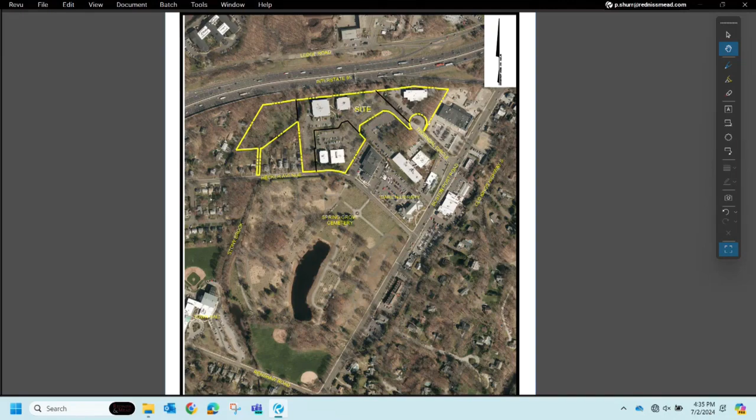This is the subject site of the Thorndal Circle property. It is accessed off of the Post Road via Thorndal Circle, bound to the north by I-95, the south by Hecker Avenue, and to the southeast by these properties along the Post Road.

This is the existing condition survey. You can see these are the 5 office buildings that are going to be removed and replaced with apartment buildings. 1 Thorndal Circle discharges via sewer lateral out to the 8-inch main in Thorndal Circle. 20 and 16 Thorndal Circle currently connect to the 8-inch main in Hecker Avenue. And then 28 and 22 Thorndal Circle flow to the northwest of the property to a 12-inch town main that flows through the northwest corner of the property and continues through the western portion down to Hecker Avenue.

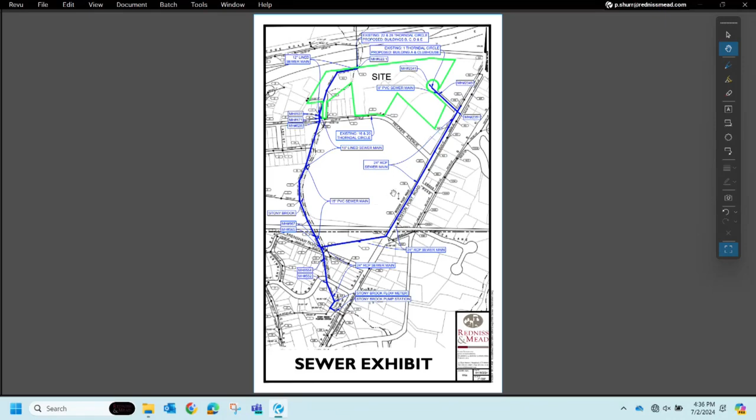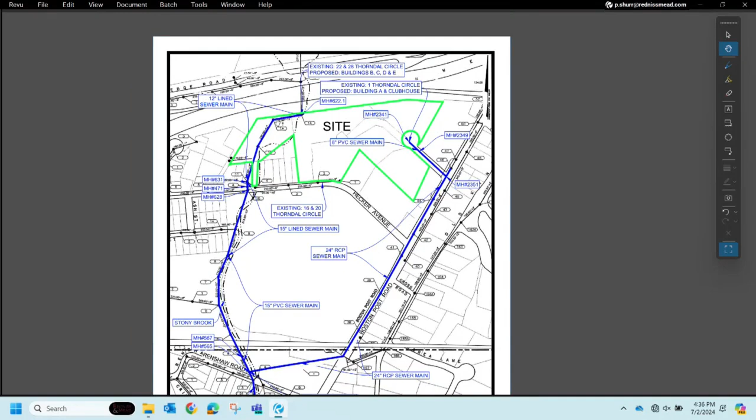Here I have a sewer exhibit laying out all of the sewer mains between our site and the Stony Brook Pump Station. The 8-inch main in Thorndal Circle flows to the 24-inch main in the Post Road. It then crosses the town property along Renshaw Road, passing under the Stony Brook, meeting the 15-inch main that parallels it before flowing down to the Stony Brook pump station. This is the 12-inch main that passes beneath I-95 and crosses our property, flowing into Hecker Avenue, where it meets the 8-inch main in Hecker and increases to a 15-inch main that parallels the Stony Brook all the way to where it meets the 24-inch main, and then continues to flow down to the Stony Brook pump station.

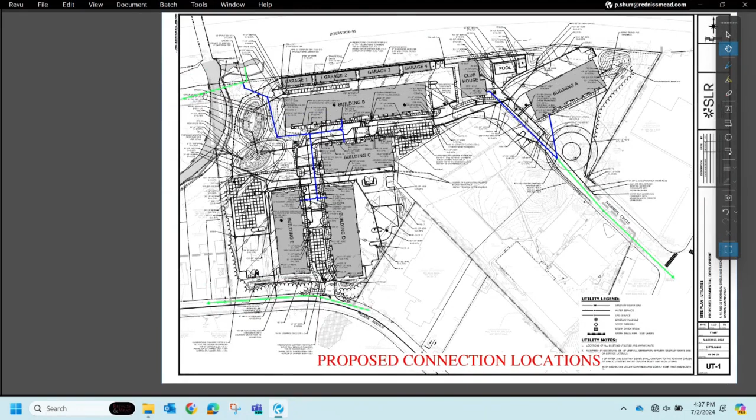Here we have the proposed plan showing the 5 new apartment buildings, clubhouse, and pool. The clubhouse and Building A both discharge via gravity to the 8-inch main in Thorndal Circle. The remainder of the buildings, via an on-site sanitary sewer system, discharge to the northwest corner of the property into that 12-inch main that crosses the property, flows through the western half, and meets Hecker Avenue.

In preparing this analysis, we had 2 study objectives. We analyzed the capacity of the receiving sewer under proposed conditions, accounting for known developments and additional potential connections within the sewer shed, for example, those currently on septic.

Objective 1 was to analyze the capacity of the gravity mains between the property and the Stony Brook pump station. Objective 2 was to assess the capacity of the Stony Brook pump station.

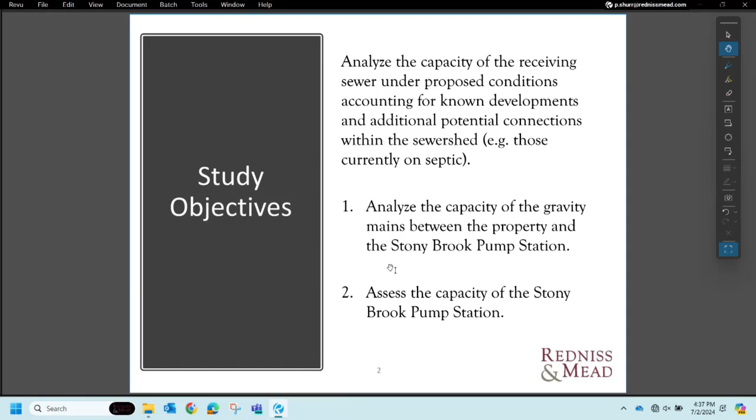For design standards, we turned to the Town of Darien Capacity Management Operation and Maintenance Program document prepared by Arcadis and dated December 2022, otherwise known as the CMOM.

In section 5.2 of the CMOM, it requires a site plan review with a design adhering to the town sewer standards and the New England Interstate Water Pollution Control Commission TR16 guides for the design of wastewater treatment works.

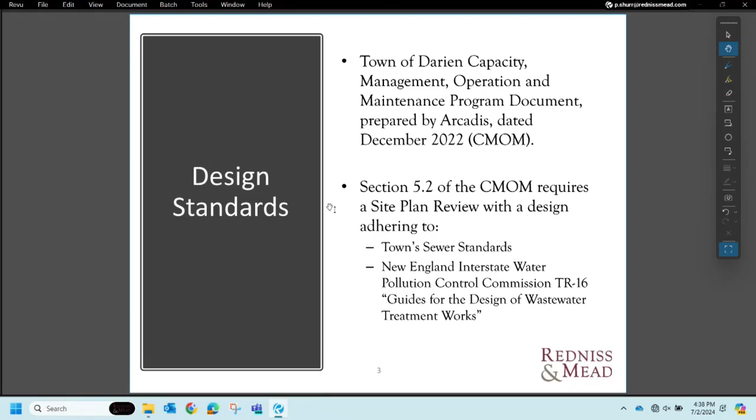Per the town sewer standards design requirements found in Appendix E of the CMOM, sanitary sewer and pump stations shall be completed in accordance with the design requirements of TR16.

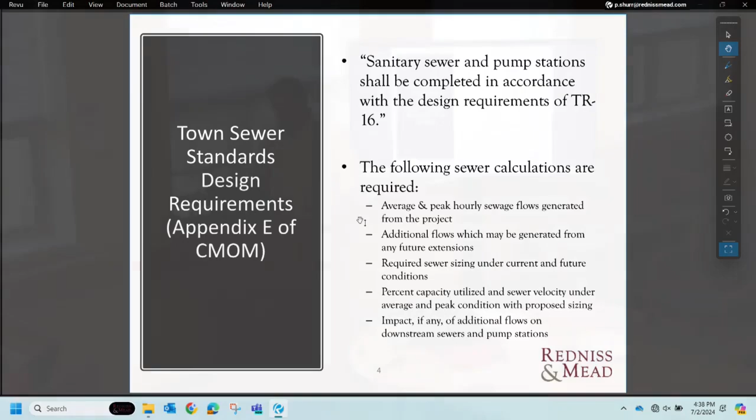It also states the following sewer calculations are required: average and peak hourly sewage flows generated from the project, additional flows which may be generated from any future extensions, required sewer sizing under current and future conditions, percent capacity utilized and sewer velocity under average and peak condition with proposed sizing, and the impact, if any, of additional flows on downstream sewers and pump stations.

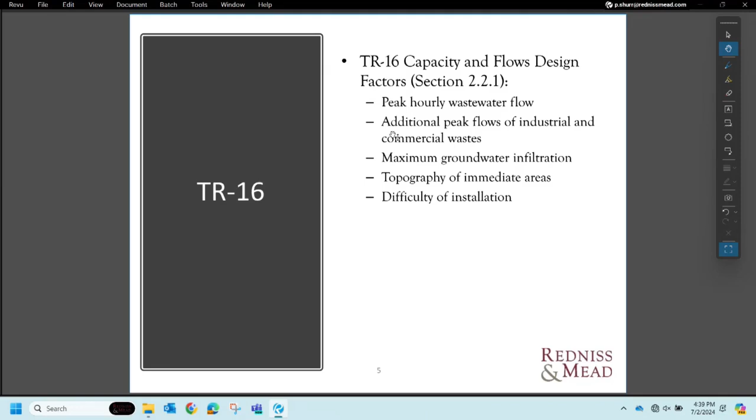So per TR16, the capacity and flows design factors include peak hourly wastewater flow, additional peak flows of industrial and commercial waste, maximum groundwater infiltration, topography of immediate areas, and the difficulty of installation.

Now when we got to evaluating the site flows, we were using the Connecticut Public Health Code. Under existing conditions, the 123,722 square feet of office space generated an average daily flow of 12,377 gallons per day. We then applied a peaking factor of 5.6 to that and converted it to CFS to get a peak flow of 0.11 CFS.

Under proposed conditions, you had the 274 bedrooms including a 50-person pool. The average daily flow was 34,825 gallons per day. And after applying a peaking factor of 5...

Can you do that calculation one time? Oh, yes, sir. So that people will understand it, because I'm sure that an everyday citizen is not going to understand your quick jumping from gallons per day to cubic feet per second.

Of course. So I would take the gallons per day, and the peaking factor is what takes that average gallons per day and calculates the peak instantaneous flow. Then I converted that to CFS by dividing it by 7.48, which is 7.48 gallons per cubic foot. Then I divided it by 24 hours in the day, by 60 minutes in an hour, and then by 60 seconds in a minute. That's how I was able to convert it down to 0.3 CFS. So that includes the peaking factor and then the unit conversion on top of that to get it to CFS.

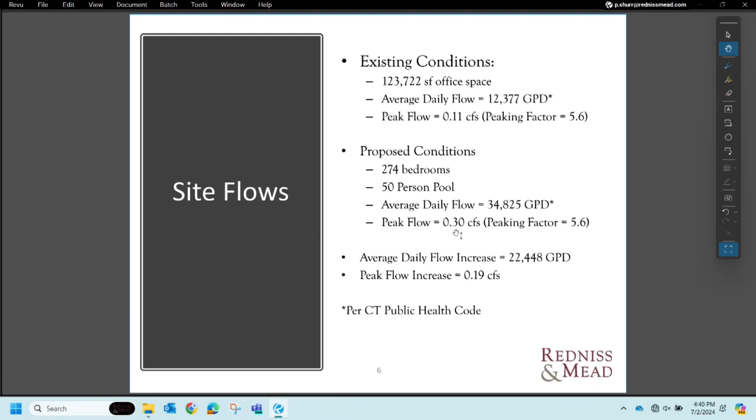So here we have the sewer shed exhibit. This is where we lay out the study points that were part of our analysis.

Study point number 1 is along the 8-inch main in Thorndal Circle. Study point number 2 is along the 15-inch main right where it crosses Hecker Avenue. Study point number 3 is along the 15-inch main directly upstream of where it meets the 24-inch main. Study point number 4 is located upstream of the Stony Brook pump station along the flattest portion of pipe in the 24-inch run, at 0.08%. Study point number 5 was at the Stony Brook pump station.

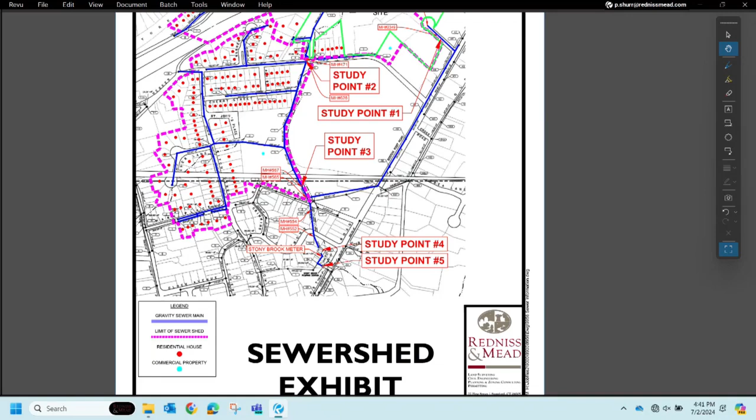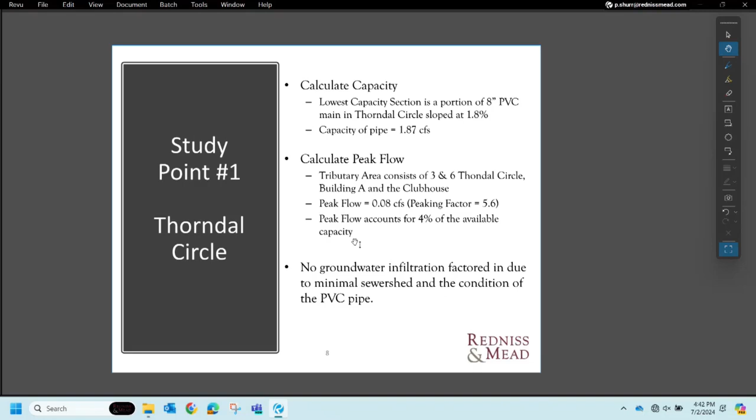So study point number 1, we studied the 8-inch pipe that sloped at 1.8% and found the capacity of the pipe is 1.87 CFS. The tributary area consists of 3 and 6 Thorndal Circle, which are the existing office buildings not part of this project, and then Building A and the clubhouse of the proposed project. The peak flow was 0.08 CFS, using a peaking factor of 5.6. The peak flow accounts for 4% of the available capacity of that pipe. We did not study groundwater infiltration because it was a small sewer shed and the condition of the PVC pipe didn't warrant it.

Next, we went on to study points 2 and 3 along the 15-inch main that runs from Hecker to the Town Hall property and Renshaw Road.

Study point number 2 is a 15-inch lined pipe sloped at 0.06%. Its calculated capacity was 1.71 CFS, and the peak flow flowing through it was 0.93 CFS, factoring in the tributary area and a calculation for the inflow and infiltration.

I apologize, I failed to point out that in calculating the flows for study points 2 and 3, you have a larger sewer shed up north of I-95 that had flow metering done by Arcadis. We factored in that flow metering and then did our own sewer shed calculation for the remainder not captured in the flow monitoring. So some represents what was measured by Arcadis, and we calculated for the remainder of properties within that sewer shed.

Patrick, one quick question. On your site itself, is it a 12-inch main sewer or a 15-inch? It's a 12. And that goes into a 15 at Hecker Avenue where the 8 and the 12 combine? Yes, sir. And the 15 all the way down through? Yes, sir. Cool, thank you.

Study point number 3, further downstream, is along a 15-inch pipe sloped at 0.16%. The calculated capacity was 3.05 CFS, and the peak flow was calculated at 1.37 CFS. We factored in additional I&I because of the additional pipe run between study points 2 and 3, and also over 100 residences that fall between those two study points. So the peak flow of 1.37 CFS accounts for 45% of the available capacity in the pipe.

We found in our study of the SSO logs provided by DPW that there were no rain-related sanitary sewer overflow events found along just this 15-inch pipe in the past 20 years.

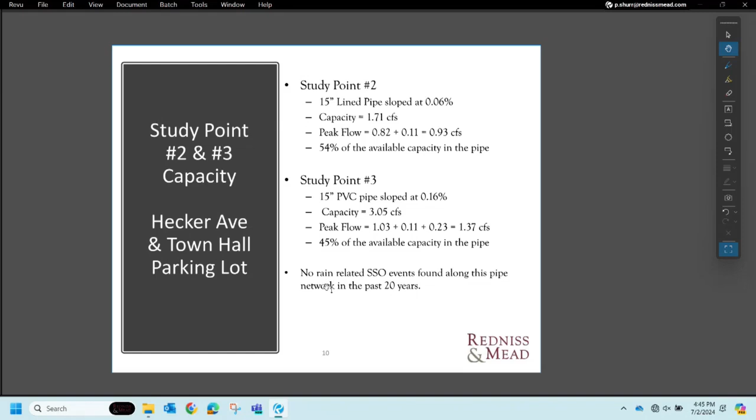Do we have any idea when that 12-inch pipe was lined? It wasn't part of this recent project, I'd gotten that information from Ms. McCarthy with Arcadis. And the 15-inch is lined too, right? That was maybe 30 years ago, could be the 80s. And the 15-inch, we got that PVC based off of, I think, the camera results, so that must have been lined previously as well. Thank you.

We installed 2 flow meters on April 24th, 2024 to verify our assumptions along this 15-inch main and witness the early initial impacts of the sewer rehabilitation. Flow meter number 1 was installed in the 15-inch main paralleling Stony Brook at study point number 3.

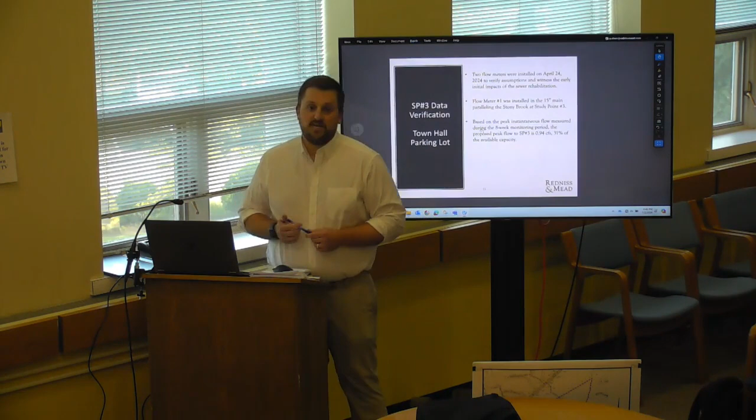We actually updated it because I wanted to take the most recent flow meter data, since we had that large rain event on Sunday - 0.88 inches in 30 minutes. When I looked at the flow gauge, flow meter number 1, we actually had our highest peak there. So I wanted to be fully transparent and make sure we had the highest possible number.

Study point number 4, as I mentioned earlier, is located just upstream of the Stony Brook. Fortunately, Arcadis had a flow meter right here, the Stony Brook flow meter, so we were able to use all their data in doing these calculations.

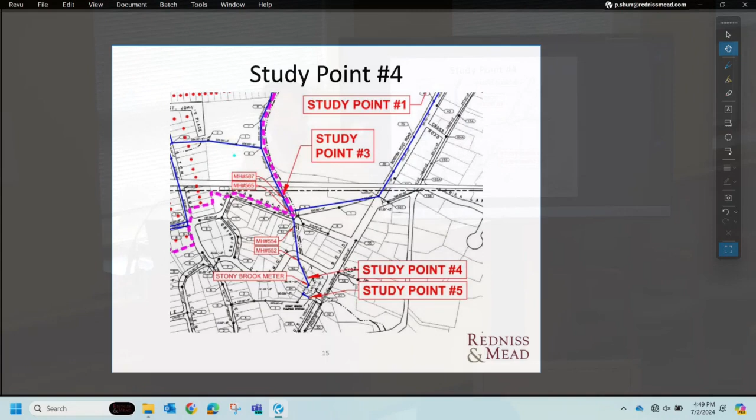So study point number 4, the peak flow rate along that 24-inch trunk main. The Stony Brook flow meter instantaneous peak flow rate was 3.73 CFS, during the 1.8-inch rainstorm in April of 2020. That started as our base to represent all known connections and the I&I associated with that wet period and rainfall event.

Then we factored in our known future flows: Thorndal Circle, Corbin District, and 7 Sedgwick. Since that area is already being flow monitored, we factored in the net increase over existing conditions. Thorndal Circle net increase is 22,448 gallons per day. Corbin District, pulled directly from their report, is 53,756 gallons per day. And 7 Sedgwick net increase is 2,475 gallons per day. The total net increase resulted in 78,679 gallons per day.

We applied our peaking factor of 4 and converted it from gallons per day to CFS, getting the peak flow generated by new projects at 0.49 CFS. We added that to the Stony Brook flow meter data and got the total peak flow for current connections and known future connections to be 4.22 CFS.

Then we went a step further per DPW's request and factored in potential future connections. These are the 368 single-family residences within the sewer shed that tomorrow could run a lateral out to the sewer and the road. We factored in flow for each one using data provided by the town for typical gallons per day for a single-family residence. Similarly, we did it for the 16 commercial properties in the sewer shed that are not currently connected.

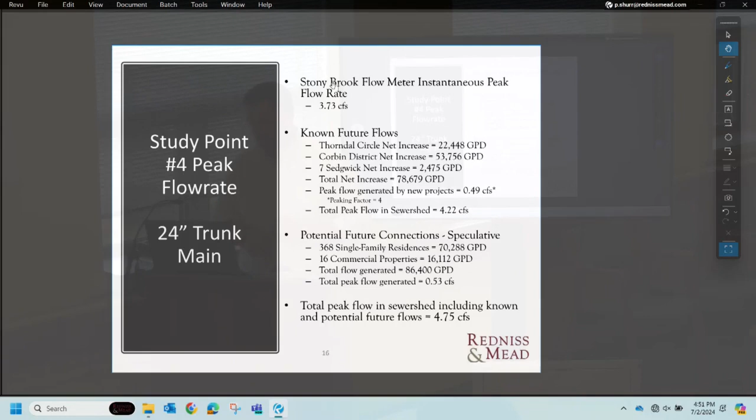The total flow generated by those potential future connections is 86,400 gallons per day, and the total peak flow generated is 0.53 CFS. We also applied a peaking factor of 4 to that. This basically earmarks all capacity for every property that has the right to connect in that sewer shed that is not currently connected. So the total peak flow in the sewer shed, including known and potential future connections, is 4.75 CFS.

This gets back to how we calculated the peaking factor, per TR-16. Here we have this line, peak on maximum day, and it is a function of the average daily discharge of domestic sewage.

The larger the sewer shed, the more of a dampening effect it has on the peak rates. With tens of miles of pipe and all these connections, you're less likely to have the peak coming out of Thorndal lining up with the peak coming out of another complex 5 miles up the road. So as the sewer shed gets bigger, the peaking factor drops.

As you can see, this red line coming down lines up with 0.7 MGD, or 700,000 gallons per day, and we found that's right around what the effluent generated by connected properties is in this sewer shed. On an average day, the connected properties generate 700,000 gallons per day. Following this up and across, I got the peaking factor of 4. I previously used a peaking factor of 5.6 for study points 1, 2, and 3, because those are much smaller sewer sheds.

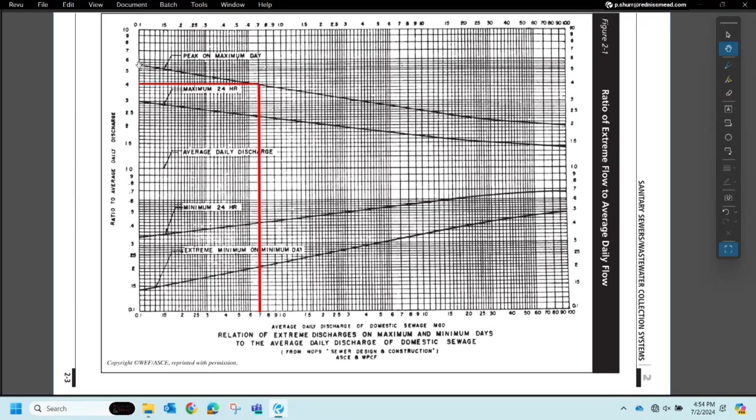So that's just the volume going through Stony Brook Pump Station, which is the sewer shed, basically, not the whole sewer in town. Correct, just through the Stony Brook sewer shed, and that's removing all the I&I. So it's just user-generated connections, since that's where you apply the peaking factor.

The peaking factor has no relationship to I&I at all. Correct. If we took into account I&I, we would actually have a lower peaking factor, because we are moving a lot more volume than 700,000 gallons per day through the system. So we were being conservative in just using the connected properties, because the larger the flow, the lower the peaking factor. But 4 is a typical number, and it is in line with the user-generated effluent, so we thought it was a fair representation.

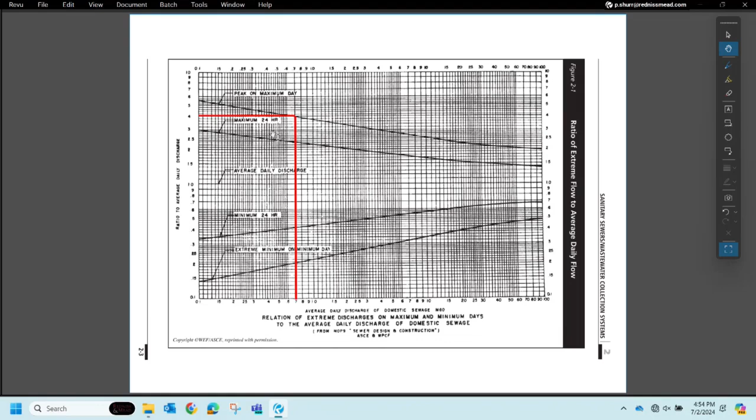So we've got our calculated peak flow of 4.75 CFS. The lowest capacity length of the pipe is the 24-inch RCP sloped at 0.08%, so that with the Manning's number of 0.014 per the Arcadis comments, the calculated capacity was 5.94 CFS.

Using that known future flow of 4.22, where we just took into account Thorndal Circle, Sedgwick, and Corbin District, that represents 71% of the pipe's available capacity. When you take into account the known and potential future flows, getting a peak flow of 4.75 CFS, that represented 80% of the pipe's available capacity. That 80% number accounts for all known and potential future connections, the peak inflow and infiltration experienced during a 3-month wet season monitoring period, and all current connections as well.

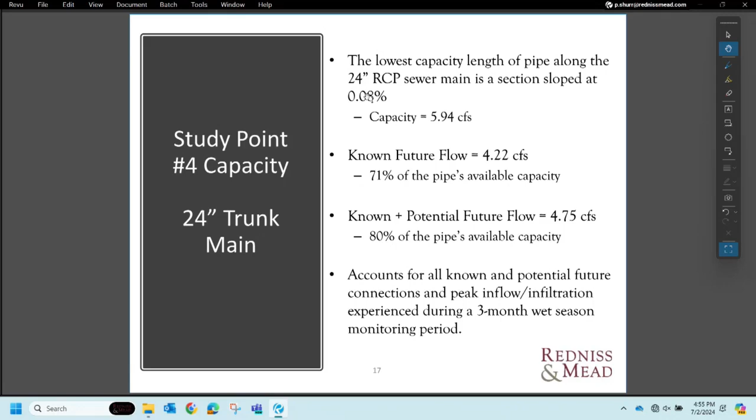Question. Yes, while we're there. I'm sorry, it's a little out of my area, but I thought that pipe capacity was at capacity at like 88%.

I've watched some videos, I think that reference is in terms of the pipe depth. There is a point at which the pipe, there's two types of capacity: full flow pipe capacity and maximum capacity. We go with the more conservative number, which is full flow capacity. But when the pipe is technically at 93% of the pipe's depth is when you hit max capacity, and if it fills any further, it actually reduces the capacity of the pipe because of the additional friction placed by the walls of the pipe.

So we would never use the max capacity because it's almost theoretical - what are the chances that when you've got all this inflow and infiltration, all these connected properties coming in, it hits that 93% of the diameter of the pipe and pushes effluent through at this maximum rate. In reality, we're just using the full flow pipe capacity, which is a more conservative number.

So the max pipe capacity at 93% is the number you use? We are not using that. I was thinking - I'm confused here what you're saying, the capacity. I'm sorry, I know you meant you were going to do it at the end, but now I'm confused. So is the 5.94 100% of a different calculation? No, the 5.94 is the full flow capacity of the pipe. Okay, and when it's 100% full, that's how much it can push through.

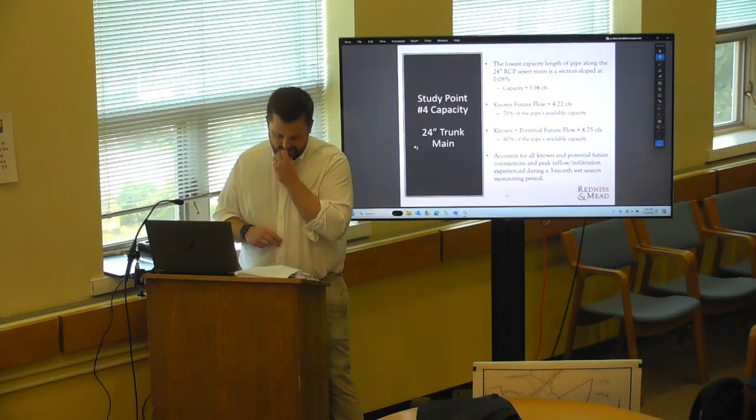What was your question, turbulence? Yeah, a turbulent flow sort of has a kind of a scouring effect. I don't know what the pipe is made of. It's reinforced concrete pipe. Concrete and wear? I can look into that and get back to you.

While we're still on this, the fact that you have 80% as the known potential for future flow, and Arcadis had 87, is that because they were using a different peaking factor than you were? That's correct.

As I mentioned earlier, we have flow meters installed in the sewer mains. The first one was at study point number 3 in the 15-inch pipe, and the second was in the 24-inch main just on the east side of Stony Brook before it merges with the 15-inch main. Those two flow meters combined to produce data comparable to the Arcadis Stony Brook flow meter, less 20 homes that happen to connect into the system downstream of the two flow meters. But it's a good indication of what flow is reaching the Stony Brook pump station.

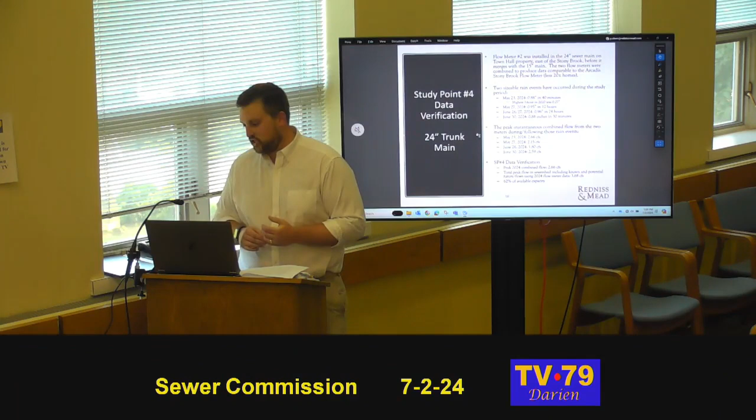During our monitoring period, this says two sizable rain events, but I've updated it to include rain events on the 26th and 27th and also the 30th. On May 23rd, we had a rain event of 0.88 inches in 40 minutes, corresponding with a peak flow of 2.66 CFS. On May 27th, we had 0.95 inches in 12 hours, producing a peak flow of 2.15 CFS.

On June 26th and 27th, we had 0.96 inches in 24 hours, with a corresponding peak flow of 1.8 CFS. Just on Sunday, we received 0.88 inches in 30 minutes, producing a peak flow of 2.59 CFS. So we reran the calculations using our flow meter data with the two combined meters, as a data verification, and have a combined flow of 2.66 CFS that was metered. The total peak flow in the sewer shed, including known and potential future flows using the 2024 flow meter data, is 3.68 CFS, representing 62% of the available capacity.

So this begins our flow diagrams. This is at study point number 4, and I'm just layering in the different flows to give a representation of how much of the pipe they occupy.

This is going to differ from your slides because in our conversation with Arcadis, they said the best representation of infiltration in the pipe is 85% of the overnight dry weather flow, whereas we were representing it as 100% of the overnight dry weather flow. This has no impact on our final numbers or whether there's capacity, but I wanted to make sure these diagrams were the most accurate representation of the data, so I made this small tweak based on what Lindsay had told us.

So just to translate, you're saying that during the night, 85% of the flow is from leaks in the pipe and sump pumps, not from actual sewage. Yes, sir. What they do is an average between midnight and 6 a.m., and then 85% because they assume 15% is actual connected flow, which is kind of just an industry standard. So the overnight infiltration, or groundwater infiltration overnight lows, 85% of the overnight lows, is 15.5% of the capacity of the pipe.

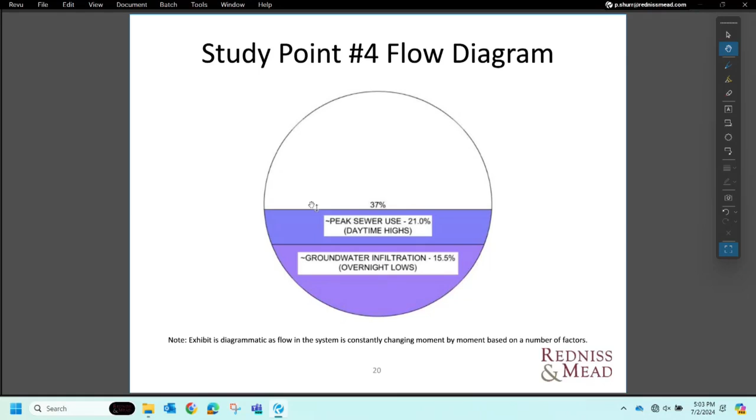Next, we layer in the peak sewer use, and this is the daytime highs, which is 21%, giving us a total of 37% of the available capacity of the pipe.

Yeah, because you said 70 in your handout. Yes, and this has been revised given those new overnight numbers, or with the 85% for infiltration.

And then we factor in the known future flows with the Thorndal Circle development representing 2.4%, and then Corbin District and 7 Sedgwick at 5.7%. So this is where you can see the inflow, infiltration, peak current usage, plus the known future connections gets us to 71% of the available capacity of the pipe.

Finally, we add in the speculative future connections, or all the residences and commercial properties currently in the sewer shed not connected. That's 8.9%, and that brings us up to the 80% of available capacity number. I just want to point out that none of this factors in the current I&I rehabilitation work going on and the clean water that's actively being removed from the system through those improvements.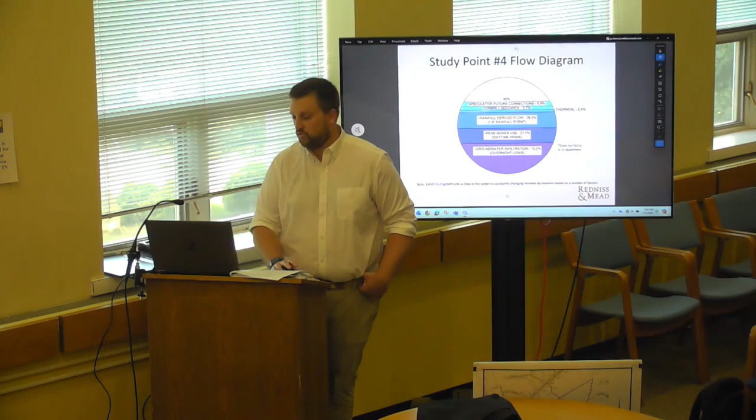And you have some documentation on that, correct? Yes.

So finally, study point number 5 is the Stony Brook Pump Station. The pump station consists of 3 variable speed pumps. We were provided 7 data sets correlating to several significant rainfall events. They were reviewed. The peak discharge rate measured from the pump station was 4.84 million gallons per day, or 7.49 CFS, during Hurricane Ida on September 2nd, 2021.

The apparent capacity of the pump station is greater than the capacity of the 24-inch RCP tributary to it, which was 5.94 CFS. The pumps were all installed between 2015 and 2017 and have an operating point of 2.8 million gallons per day each at a total dynamic head of 100 feet.

Per the Arcadis pump station evaluation report, during wet weather events, flow increases up to 3 times the average daily flow. Although there is a significant increase in flow, typically only 2 pumps are required during extreme weather events. So given that the upstream pipe has the lower capacity, that helps guarantee that the pump station will have the capacity to pump whatever reaches it.

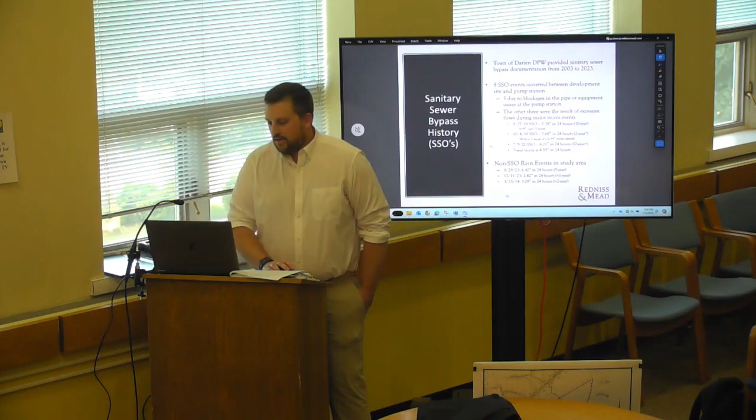So we studied, the town of Darien DPW provided sanitary sewer bypass documentation from 2003 to 2023. Of the 8 sanitary sewer bypass or sanitary sewer overflow events that occurred between the development site and pump station, 5 were due to blockages in the pipe or equipment issues at the pump station. The other 3 were the result of excessive flows during major storm events.

So you saw an SSO event on September 27th, 2018, in which 5.38 inches of rain fell in 24 hours, correlating to a 10-year storm. That storm actually continued and produced 6.95 inches over 72 hours. That's significant because the next SSO occurred a week later, in which 3.68 inches fell in 24 hours, corresponding to a 2-year rainfall event.

However, you have to also account that within that week, there had also been 6.95 inches of rain that had fallen. Finally, July 9th, 2021, there's an SSO event after 6.01 inches fell in 24 hours, which is over a 10-year event. Just for reference, a 5-year storm is 4.55 inches in 24 hours.

We then looked for... Patrick, can I just stop you for a minute? I did ask Darren what manholes these were, and when he looked back in his records, he did not find the SSO on September 27th. Would you have, and he also apparently didn't save the documentation he gave you for 2003 to 2023. Do you have that, and could you show that?

I do, yeah, and actually, Darren gave me a call after, and what we found is he provided me with an Excel sheet that summarizes all the SSO events, and then he provided me with the handwritten documentation for each individual one. The Excel sheet had it as 9/27, and the handwritten ones had it at 9/25. But I believe that was the 25 Renshaw Road address. So though he said 9/25 and I said use 9/27, that is the SSO event in question, at 25 Renshaw.

In his email to me this morning, he said that the only ones on or about September 27th were our favorite one over at Old Kings Highway North in Sedgwick, and 141 near Water Lane. Of course, I can provide. But there was nothing until October for the 25 Renshaw Road, and yet another one at Sedgwick.

I can provide the documentation he sent me. I would, if you have it in Excel, I would love for our person. I couldn't find my Excel sheet. I probably made it for him and sent it on. I want to work with Penny and have her put something together so that we have this in Excel, so we always have this information in our records.

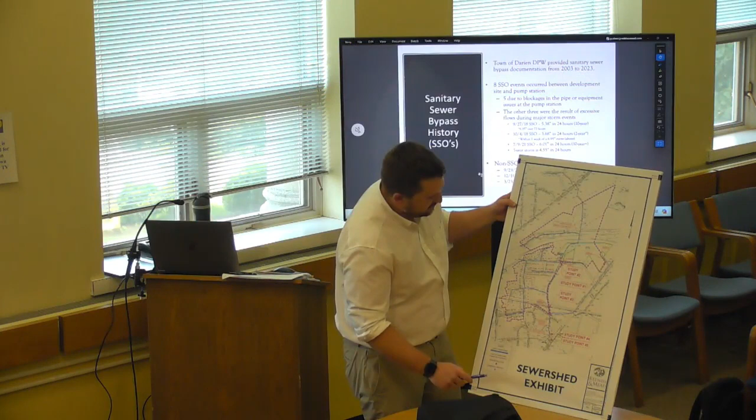I remember the house and everything. Was that the manhole in their front yard, right? Yes, by the hedgerow, I guess. That's right, small tributary, so that would mean that the whole pipe would have to be filled, and that the pump station hasn't kept up.

We're assuming that's because you're creating a tailwater, backwater, yeah, or a headwater, a larger retention in the pipe itself. And the only reason it didn't pop somewhere else is because they're bolted down.

Is that the tributary sewer shed, like an 8-inch line that does the houses only? Correct, and then it meets with our 24. So even though it's not technically between ours, it's definitely being impacted by the tailwater of what's in the 24-inch pipe.

On July 9th, that was reported as happening on 2 Renshaw Road, and that was Tropical Storm Elsa. You had that whole field inundated. From what I understand, when Darren explained this to me, when they do an SSO report, you have to choose the closest property. Got it. There were probably plenty of manholes that were submerged out there during that event.

But so it's the 24 inch, not the 15 coming down. That's probably where after they combine. All right, cool, thank you.

So then we looked at 3 other rain events, 2 of which caused SSO events, for the mechanic or the Sedgwick manhole. And these were all events in which there were no SSO events reported between our property and the Stony Brook pump station. So that's September 29th, 2023, 4.4 inches fell in 24 hours, which is a 5-year storm.

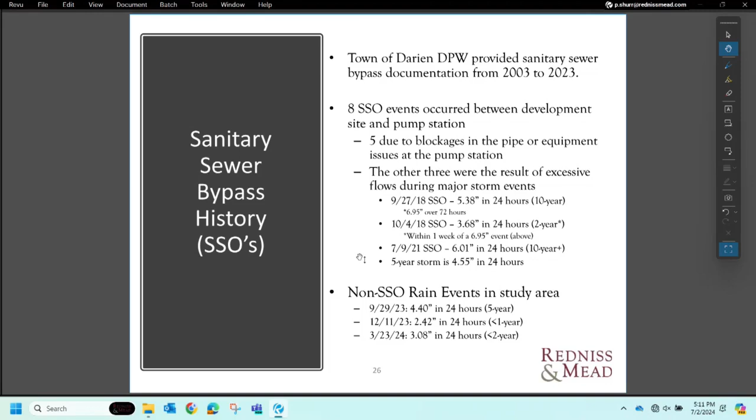So as you know, Darien's currently undergoing an inflow and infiltration rehabilitation program. The 3 phases of the project include rehabilitating 32,152 linear feet of pipe, rehabilitating 244 manholes. And during phase 2 alone, 64 manholes in flood-prone areas will be equipped with watertight frames and covers. An additional 49 will be equipped with inflow protectors, and 10 will have their frames and covers raised.

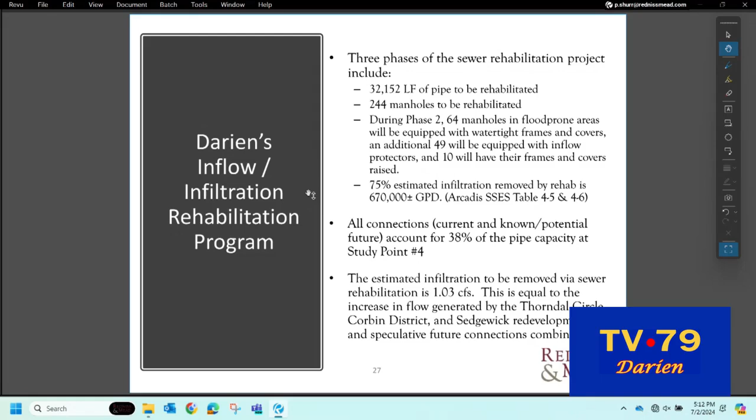I point that out because in these larger storm events, when you have manholes completely inundated, you can just imagine the impact the direct connection of floodwater into the system has. So these steps, even though in these smaller storms they might not have an immediate impact, I think those are going to have a very big impact when you have these larger storm events and have surface waters that were previously going in through pick holes and through leaks in the manhole.

So per the Arcadis SSES report, tables 4.5 and 4.6, the 75% estimated infiltration removed by rehab is 670,000 gallons per day. So as I mentioned earlier, all connections, current and known or potential future, account for 38% of the pipe capacity at study point number 4.

And the estimated infiltration to be removed at the time of the report via sewer rehabilitation is 1.03 CFS, and that is just converting the 670,000 gallons per day to CFS. No peaking factors were involved since it is infiltration. And that number is equal to the increase in flow generated by the Thorndal Circle, Corbin District, and Sedgwick redevelopments and speculative future connections combined.

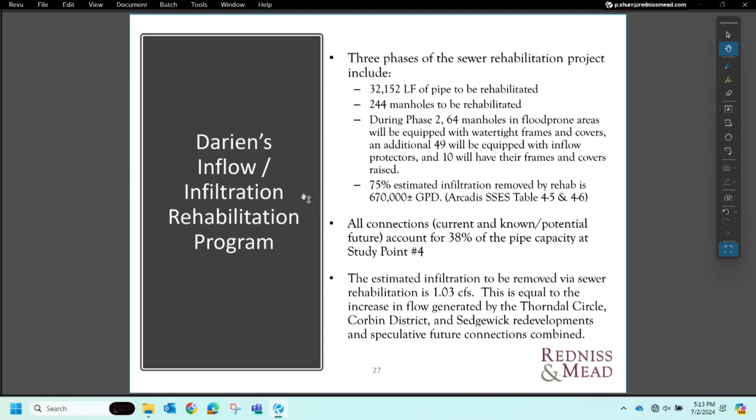And none of this includes removing any of the sump pumps. Correct, these are just the current projects underway. I looked up their tables, 4.5 and 4.6, and those are just manholes and pipe, treating the pipes. So anything we do with sump pumps is icing on the top. Exactly. But it's even more, that's crazy.

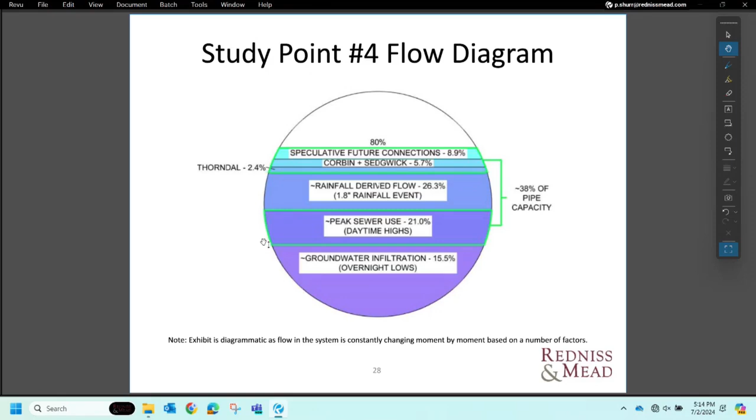So back to the flow diagrams. This is the final capacity with known and speculative future flows. As you can see, 38% of the pipe's capacity is generated by the current connections and all future known and speculative connections. The remainder of the pipe is occupied by clean water from I&I. And you can imagine in an SSO event, when this pipe is full in flow and has head pressure on it, these make up an even smaller portion of the total flow moving through that pipe.

So here we've taken the pipe and we're just looking at the known future connections, because of course these speculative future connections might come in drips and drabs. It might take 20, 30, 40 years before you actually see a sizable portion of these residential and commercial properties connecting. So we looked at this as what it's going to look like in 5 years with these 3 projects done, with phases 1 through 3 of the I&I program completed. What you've got here is you take the 71% of the known future flow and it comes down to 54%. Of course, all of these diagrams have this note, but it's important to note that this is diagrammatic as flow in the system is constantly changing moment by moment based on a number of factors.

And of course, Arcadis estimates based off of the flaws they see in the pipes and what they're doing. So these are all speculative numbers, but it should be a close enough representation to show the impact that removing that clean water from the system will have on the capacity of the pipe.

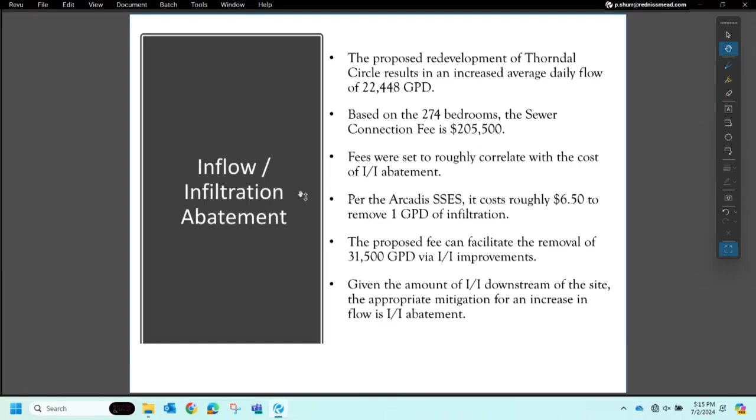So, stupid question. If their estimates were correct, how little flow would there be in the pipe at night? Oh, that's a good question. I'm trying to think of where I can find that data.

I guess it's tough to tell because the way they estimate it is by looking at these flaws, they try to figure out, for repairing each one, what it'll generate. And one of their comments was actually, be careful using this in your flow reports because these are under certain conditions. It might not be indicative of the flow taken out during drier conditions.

No, I mean, I see the sewer line like the highway, yeah, and you don't want the traffic. You'd rather have flow 24/7 where it's moving than that.

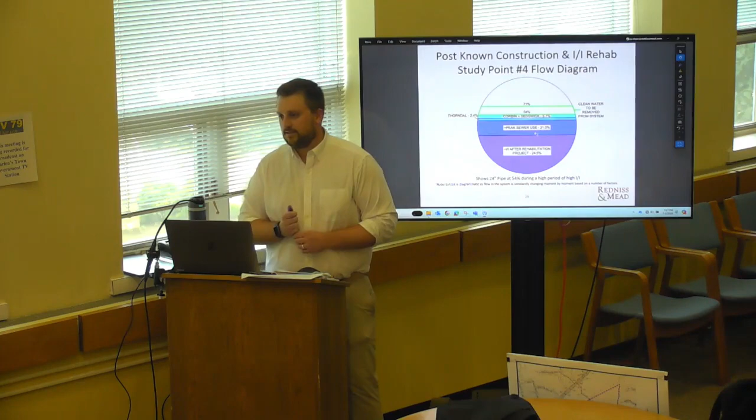So that's where I'm coming from with removing I&I and how low the flow would be at night. I mean, then there's useful space there that could be used.

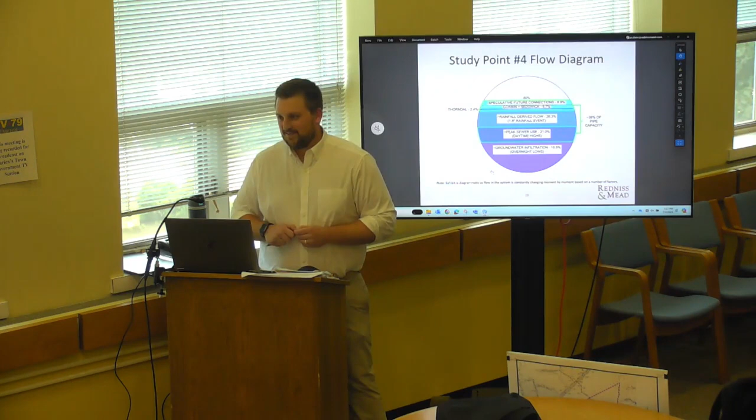Oh, of course. And so we see the drop from clean water being removed is about 17%. In our previous estimates, the overnight flow was 15.5%. So if I were to just use that number and say we're removing 17% from the pipe, then we would have no infiltration. But I don't think that's indicative of what would actually be happening because there's still other problems to be found. Disney World's in Florida, not here. So that's not happening. No. Okay.

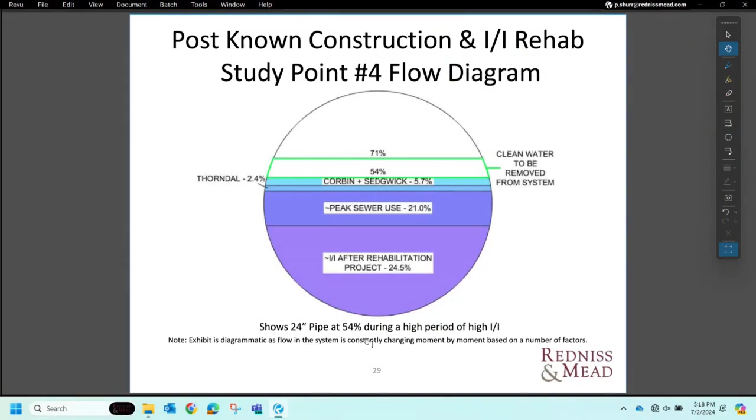Can I ask another stupid question? Does slope have anything to do with it, the slope of the pipe? There was something in the Corbin project I picked up on about the slope of the pipe. Yeah, where the slope of the pipe is less, you're going to have less capacity because the water doesn't move along, because the water is forced, or moved, by gravity. Okay. And that's why when we chose which study points to use, we always selected the flattest pipe, because that's going to be the most conservative number since it has the least amount of capacity. Thank you.

So then, inflow and infiltration abatement. The proposed redevelopment of Thorndal Circle results in an increased average daily flow of 22,448 gallons per day. Based on the 274 bedrooms, the sewer connection fee alone is

$205,500. And I understand that the fees were set to roughly correlate with the cost of I&I abatement. Per the Arcadis SSES, it costs roughly $6.5 to remove 1 gallon per day of infiltration. So the proposed fee can facilitate the removal of 31,500 gallons per day via I&I improvements. Given the amount of I&I downstream of the site, the appropriate mitigation for an increase in flow is abatement.

I have to amend that. You're still connecting to the single most expensive entity the town of Darien owns. So yes, it happens to be that number, but in my opinion, it is a combination of two things. It's not just there for I&I removal, it's also continuing maintenance. If you want to drop in a package plant and discharge into Stony Brook, by all means, but you'd rather do this. So there's a cost to joining the club, of course, and it is a very significant asset of the town.

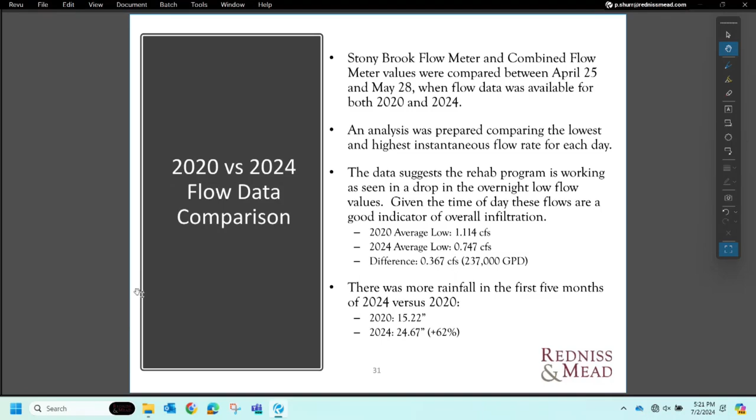It's important to note that there was much more rainfall in the first 5 months of 2024 versus 2020. In 2020, we had 15.22 inches, and this year we've had 24.67 through the end of May, which is a 62% increase. I just wish we had those groundwater monitors in, because it would be interesting to see how much higher it is.

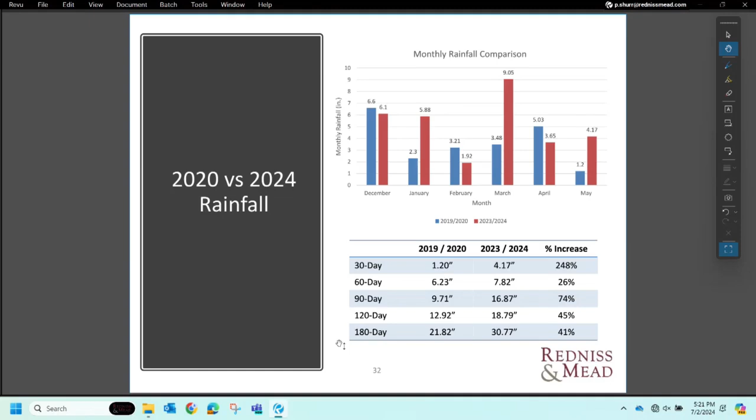Here we have an encapsulated comparison of the rainfall data. Up here is the month-by-month comparison, and then we have the trailing numbers for 30 days, the last 60 days, 90, 120, and 180 days. As you can see in each factor, there's a pretty substantial increase in rainfall.

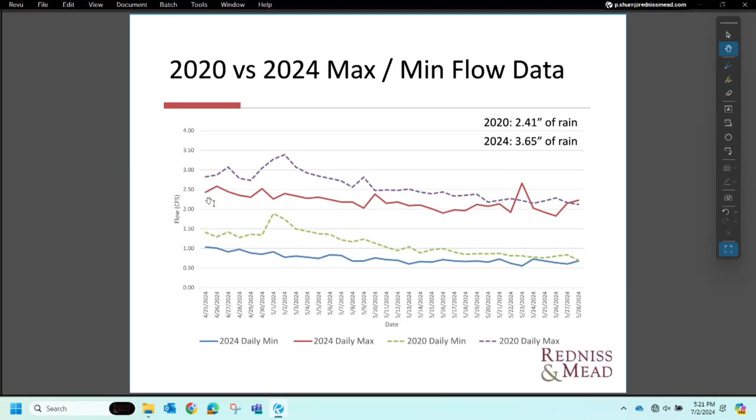Here's a graph showing that same information. The dotted line corresponds to the max and the minimum for 2020, while the solid lines correspond to the max and min for 2024. You can kind of see this gap between the lows of 2024 and 2020.

So in summary, the calculations and report demonstrate that there is capacity in the system for the proposed development, factoring in known and potential future flows. Our analysis has also been reviewed by SLR and Arcadis, and they agree with that finding.

The study factored in the I&I associated with a 1.8-inch rainfall event during a period of high groundwater. The documented SSO events demonstrate that the sewer between the proposed development and Stony Brook Pump Station has available capacity through the 5-year storm. Also, ongoing I&I rehabilitation projects will have a significant positive impact by reducing system flows and increasing available capacity in the system.

The 2024 flow metering data does seem to suggest that it is working. And then finally, the $205,500 connection fee provides resources for future I&I projects that can eliminate enough infiltration to more than offset the increase in flow from the proposed redevelopment.

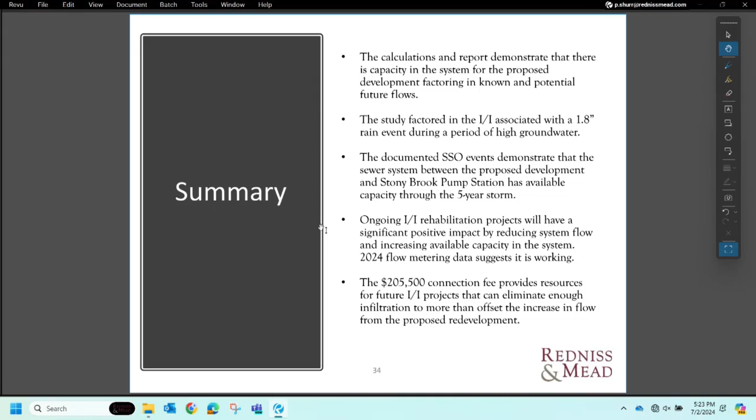Now, if you have any questions.

I've got a weird one, and it's kind of a curveball. The dewatering that's gone on to develop the Corbin project, how would that have affected some of the I&I that may have been included in this, were it not dewatered? Wow, and that's not answerable, but it just occurred to me that when they did the Brooks Brothers building, they had to dewater to build a proper basement.

He's done even more. Is that connected to the sewer, actually pumped into the sewer, the dewatering at Corbin? Brothers? No, the dewatering, Corbin. Where are they putting that water? Into Stony Brook? I'm not aware of any, they would have had to come to us. They thought about it, I think they would have tested it, yes.

Water and gotten approval to discharge into, I think, the sewer, discharged to that drainage structure. I'll ask David about that. It should go to storm dewatering, and I guess you might have a very localized impact if you have some I&I in the area.

You might be dropping those groundwater levels, but the radius of influence is not going to be big enough to have an impact. And there's a lot of rock too, he's chipped a lot of ledge, so it wouldn't be, it's quite an excavation.

There are some older buildings along the Post Road that we suspect may have been connected with sump pumps. It proved not the case with one. There's quite a few that might have basements and maybe connected, and they wouldn't need to use their sump pump because there's no groundwater. They're just throwing it out there. Thank you.

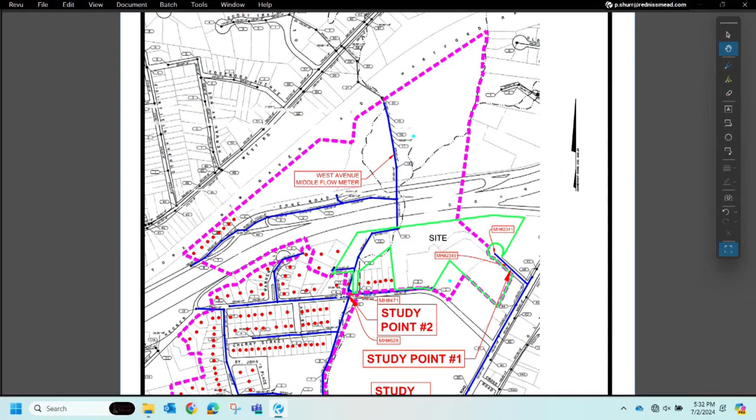Sewer shed, of course. The sewer shed was limited to just the area between, here's the flow meter right here, and our sewer shed that we studied was limited to the area tributary to the pipe between the flow meter and our study point. So we basically did a sub sewer shed between the flow meter and our study point, taking the flow meter data and adding on these residential properties you can see dotted in red, our property, as well as Atria, adding that to the flow meter data for the few properties between our study point and the flow meter.

Oh okay, all right, sorry, I misunderstood that. And you could then level that with the study point 4 or something and see how they jive, maybe get an I&I indicator of what's in the sewer shed there.

Yes, so we were able to use the Arcadis data to calculate the anticipated I&I for those lengths of pipe, and that's what you saw in the Arcadis response memo - they gave us an inflow and infiltration number for just the Stony Brook sewer shed, the sub sewer shed, not all the other tributary ones, and then we scaled it based off of inch diameter mile of pipe. So we calculated how much inch-pipe there is, and took a proportion of it relative to how much pipe is upstream of those two study points.

That's cool, so we have a pretty good idea how this functions. Yeah, and then we have our flow meter, which helped verify it. I think we calculated around the 50% mark for study point number 3, and then the real world conditions revealed by our flow meter were closer to 30%.

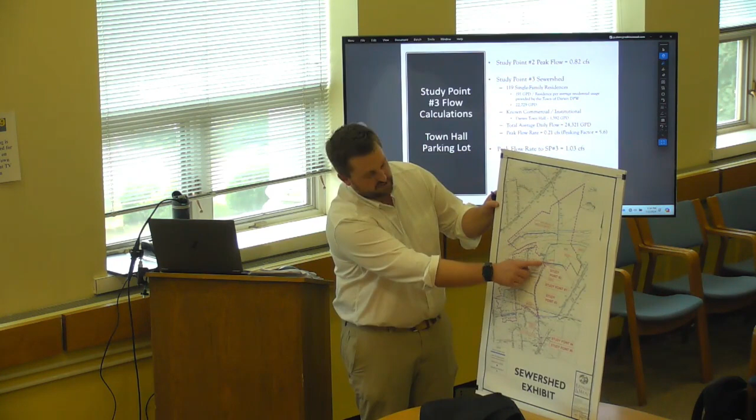And when you added the 119 single-family residences that I'm assuming were on septic, on page 13. Yes, so these are the 119 properties that are downstream. So you have study point number 2 right here, and this is the study point number 3 sewer shed. So these properties discharge to the 15-inch main between study point number 2 and number 3.

Oh, so you're saying that those fully occupied, multiple bedroom houses are the same as the average for Darien? Yes, that's 191 gallons per day.

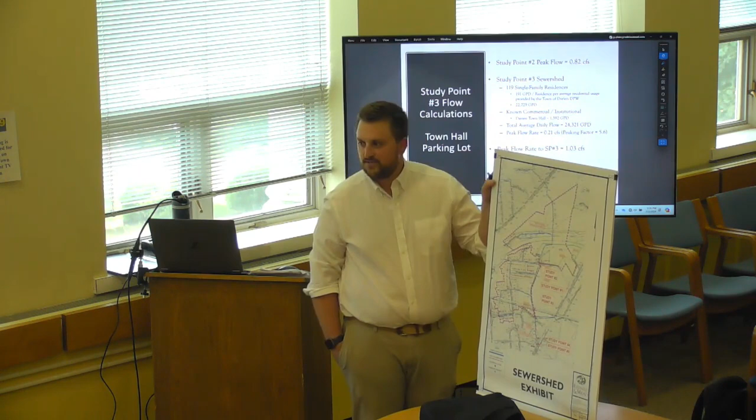All right, I'll leave that alone, but okay. And then, yeah, because none of those are one-bedroom condos or barely occupied homes. Well, so Darien provided me with a number that's... No, but you're taking an average of the town and applying it to a part of town that isn't going to be like that, they're going to live there differently. So it's a little different than the town as a whole. Am I correct? Yeah, sure.

And that's also why we installed the flow meter, for one. That's why we installed it, because we were concerned, or we weren't concerned, but we wanted to confirm, because we made some assumptions in calculating study point 2 and 3. So that was one of the driving factors for putting in the flow meter right at study point 3, so that we could get real world data on what's being contributed to the system by the connected houses.

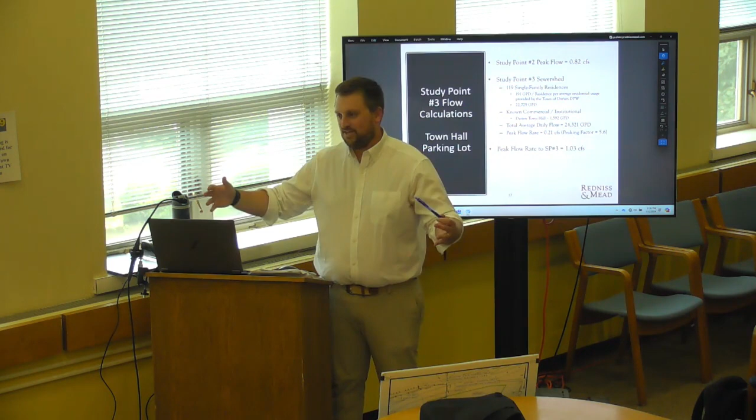So that's right here with the study point number 3 data verification. We put the flow meter in right at study point number 3 and found that the peak instantaneous flow rate measured was 0.94 CFS. So then we ran that whole calculation again, adding in the Thorndal Circle redevelopment, and it made sense. We wanted to verify that because we agree there's a lot of theoretical numbers in these calculations, so it always helps to be able to hang our hat on something real.

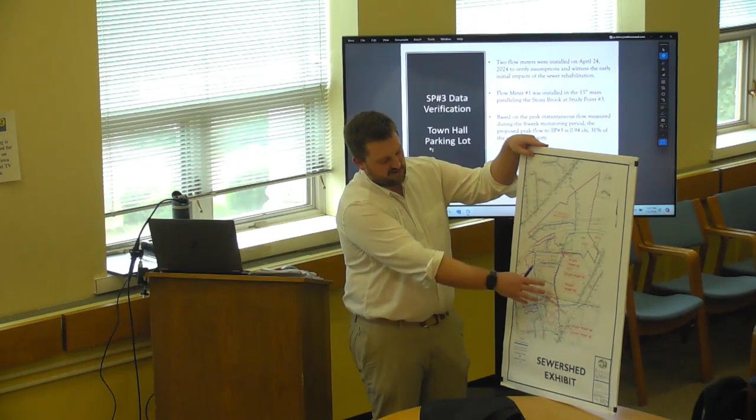It is not a 90 degree. I can find exactly what it is and pull up the photo, but it's not a 90 degree coming in. I could see it, well, I'd say it's close, maybe 80-something degrees. And it's the wrong way, it's 90 degrees plus going up from the flow. I sketched that in on the sewer shed exhibit. This is a really old map, and since then a new 24-inch main had been run through the field out there. So I was using as-built drawings, I think from like the 80s or 90s, and just approximating it in. So if it looks like a 90-degree angle, I wouldn't trust that.

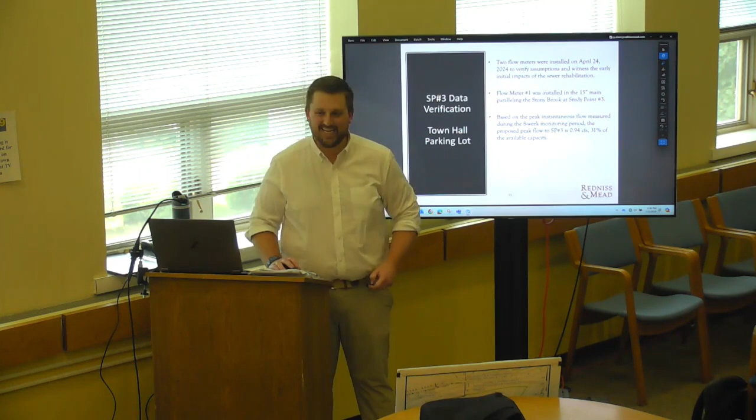If you're doing plumbing, and I know a little bit about building houses, you'd put a Y there and get a sweep, and combine it in a way where you don't do a 90-degree. That would have been flagged immediately. So this is just a sketch. If we were worried about anywhere in the system needing rehab, is that a point we'd worry about because of the two combining together?

No, I mean, for scouring or anything, based on what we've seen, it looks good. There hasn't been any issues in regards to surcharging that we've seen, under normal conditions or peak conditions.

Okay, cool, thank you. That's one time to really bring the brain trust here. Of course, we do our best. I'm trying to pull up a photo of it. You can tell we read everything, and all of us spend a lot of time, and we appreciate your time too. Oh, of course. And just for the record, that was Lindsay McCarthy from Arcadis. Oh, yes, well done.

Now when we get to the Stony Brook pump station, why do we switch the pumps to MGD as opposed to CFS, when we were talking about CFS this whole time?

So I was quoting the Corbin District study, I believe that's where I pulled this information from. They had specifications on the pumps, so that's directly quoted from them. I could convert it to CFS, but to me it becomes kind of pushing the numbers towards your narrative.

I'm sorry, I'm the cynic in the room. Oh, no, and unless staying with one term throughout, to me is much more transparent. Yeah, and that was not my intention.

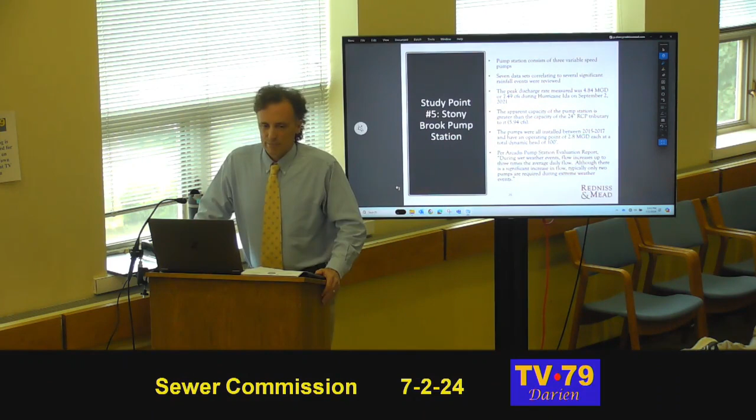Like I said, I think of the sewer system as the highway, I-95. And to me, you want to try and figure out ways to have people drive it in off hours. Whether they work a 12-hour shift or like I go to work at 6 o'clock in the morning, I can get down there no problem. So to me, the idea of storing and pumping off hours makes sense. It just makes sense to me.

And also when they're adding the water and pumping it, they're going to macerate it, so it's going to be a better sewerage. It's going to be less apt to cause problems down the line.

I hear your thoughts here. Some of them seem a little ticky-tack. I mean, telling me that there could be a storm at night or during the day where you've saved space for the storm water, it works both ways on that one. It does.

You could just have it so that you're storing 30,000 gallons and the pipe overflow goes to gravity. It doesn't have to be all this technical jargon, I think it could be done very simply, just pumping the tank, the stored water. So I'd love to hear your thoughts on my thoughts.

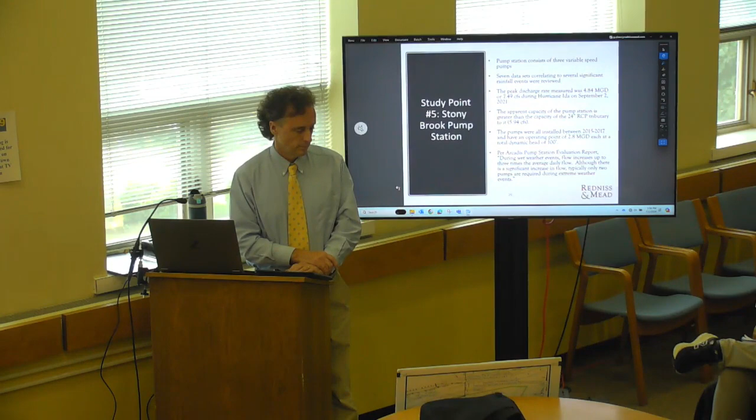In regards to your question on whether there's still going to be flow in the pipe if we eliminate all the I&I, that goes back to what we had in the report and what Redniss and Mead covered today. Any of these I&I projects, while it would be wonderful to remove 100%, it varies. We use 75% as the number in our SSES report, though it varies depending upon sewer shed and conditions and all of that, but 75% is what we use. So essentially there will still be nighttime just sewer use flow in there, in addition to still some I&I in the system. I'm just wondering if it's going to drop below, what is it, 2 feet per second, so the solids drop out of suspension. And I'm thinking that could cause issues, but that's just a question I'm throwing out there.

You're correct, 2 feet per second is scour velocity, right? I remember, it's been a while since I've taken the test, but yeah.

Okay, I'm done. Peter? Come on. Really? Thank you, you're the smartest guy in the room. Excellent, we've been asking questions all along. I thought it was well presented. Darren, do you have a question? No, can we have Lindsay support her conclusions? That'd be great. Absolutely, yeah.

Do you guys have any questions? I can stand up if you have any additional questions for me.

Well, quick one on the I&I, 75%, is that 75% of the fixable I&I, like our pipes, and not sump pumps? Or 75% including, the 25% is the sump pumps, you'll never get to all of them? So the number that we used in the SSES report is the infiltration that we were able to identify when we reviewed the CCTV videos in addition to the manhole inspection reports. So it doesn't add in any inflow into that number, it's just the straight infiltration. With some of the work that we are doing, it is also mitigating inflow from entering the system, so that's the watertight framing covers, the inflow protectors, and some that we are raising above grade. Those will help mitigate the inflow, but that isn't factored into that infiltration rate.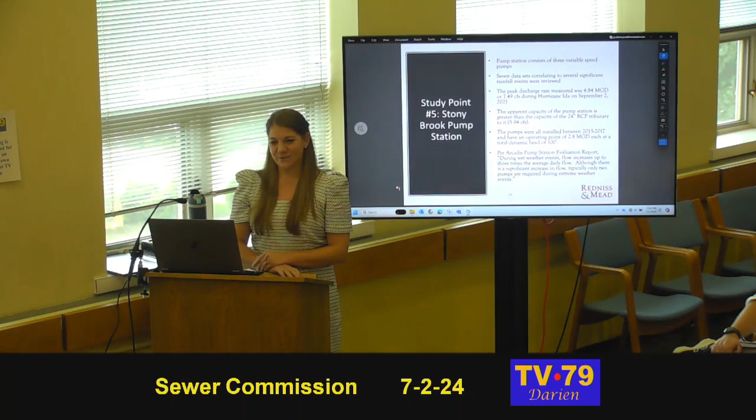So bang for the buck, I know this is totally off kilter here, it's like 4.2 houses with sump pumps is this whole development in terms of impact-ish, maybe it's 5. That's, to me, mind-blowing that we don't aggressively look at that as a problem. When we're here, and you guys are spending a great deal of money, and we really appreciate the talent level and the reports and everything else to help us understand not only what your development is, but what our system is, we really appreciate that. But if it's 5 houses that don't care, equal to this, and this is what we're putting the importance on, it's mind-blowing to me.

Sump pumps is a very challenging topic for all municipalities. It is something that isn't a quick fix, as you guys all know, it's been discussed.

Well, we all come from different boards, wetlands, planning and zoning, flood mitigation, and now here. And we would see a lot of homes being developed with 9-foot basements in a known wetland, and we would say, really? And 4 sump pumps, 24/7, what are you gonna do? Pump it out in the yard and it's gonna keep back, and they build a brand new house, supposed to. Here's your new house. So our history goes back further in this problem.

Yeah, and I think we're going to look at that. I'm hoping we're going to look at that next, we can be a leading town in coming up with a way to handle how you find out who has sump pumps. Yep, and we have worked with communities that have taken on that whole sump pump investigation program, and it's a lot of work, but you can sometimes see amazing results with it. Oh good, and we appreciate everything you've done, we can count on you to help us since you have experience. We'll find them. Sign you up.

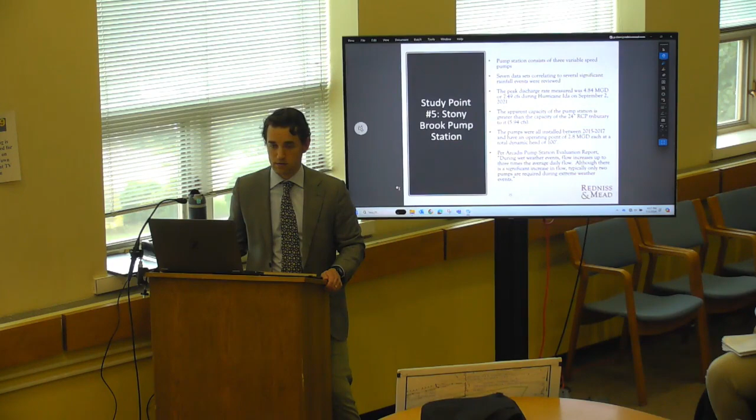I don't know when your next meeting is, if this would take place later in the month or in August, the second Tuesday. Could you guys make a meeting in between? I mean, we can, I don't have a problem making a meeting in between, I just need a little bit of time to digest. Moving some other issues to then might make sense too, since it's already 20 minutes after 6.

Darren, what would that process be like if we were just to say, within 2 weeks, do we have notice for a special meeting? Yeah, you have to notice a special meeting for sure. For how long in advance? 48 hours beforehand.

So when would you leave? I leave on the 17th, so if we could do it before the 17th, not on the 16th, I'm not gonna make you late for your plane. The 16th is a Tuesday. Wait, today's the 2nd, so it would be the 16th. We'd have to, I can make a Monday.

Sorry, we're keeping you guys here for this, but unfortunately we don't feel comfortable giving a decision tonight. I think we're comfortable expediting it and not waiting a month. So we're willing to agree to work with that, you just gotta work with us.

Do you want us to maybe coordinate with Darren on the date, or is the 15th fine? We're going to be here with the P&Z Commission next Tuesday. I don't know if that's too quick a turnaround. When does P&Z start, 8? 7 o'clock. 7? When did they start meeting at 7? What happened to 8 o'clock? Okay, so I could do it next Tuesday.

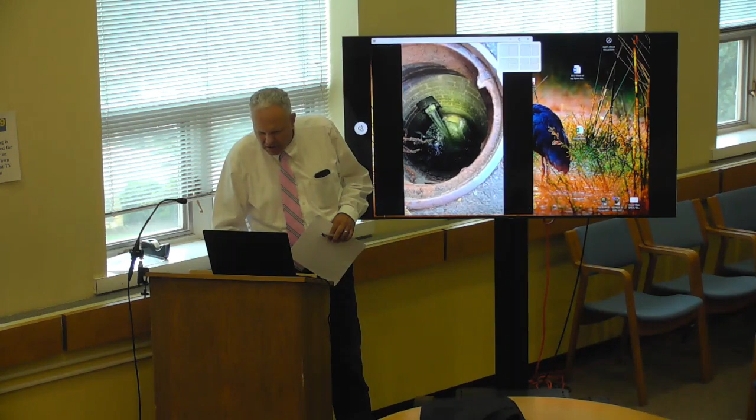And here is the one that I just showed you on Mechanic Street. I'm pretty sure that that one was also grouted. See that? That's all coming in alongside the pipe.

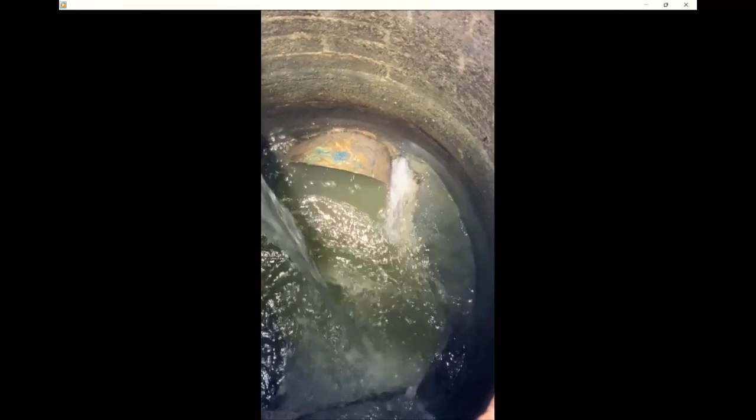This is a drop lot, it's ridiculous, it's coming in alongside the pipe, it's just roaring in there.

So yeah, they've started rehab on this one. What they've done thus far is the grouting, but we also recommended bench and invert repair, adding a drop pipe so that the flow coming out of the lined pipe isn't dropping directly into the invert, because that is holding back the flow coming down Boston Post Road, and also cementitious lining.

So it's disturbing the flow. Yes, that's definitely part of it. So we're going to add that drop pipe in, so it comes onto the bench and then we'll essentially have an invert from the bench flowing into it.

You're doing an inside drop, not an outside drop, right? Inside drop, yes.

That's not the manhole that's popping in front of Goodwives Shopping Center, though? No. We're actually doing one across the street as well, at West Avenue and Boston Post Road, pitch inside the West Avenue side, adding one as well at Mechanic and Boston Post Road as well. Similar thing where there's a lot of infiltration coming in, not a drop pipe, but all the same recommendations.

Oh, that's cool. I don't know if I'm breaking any rules here.

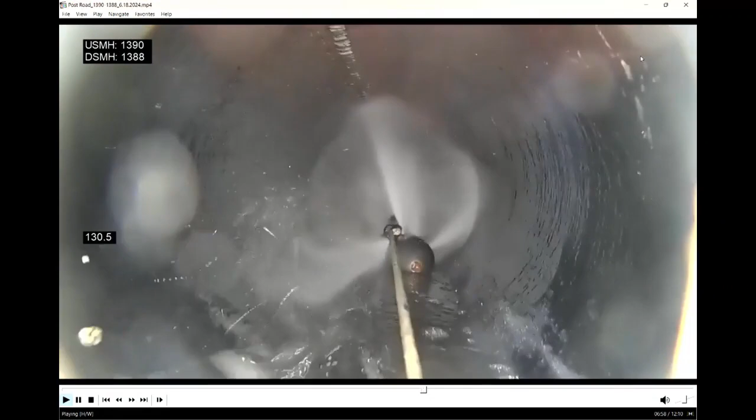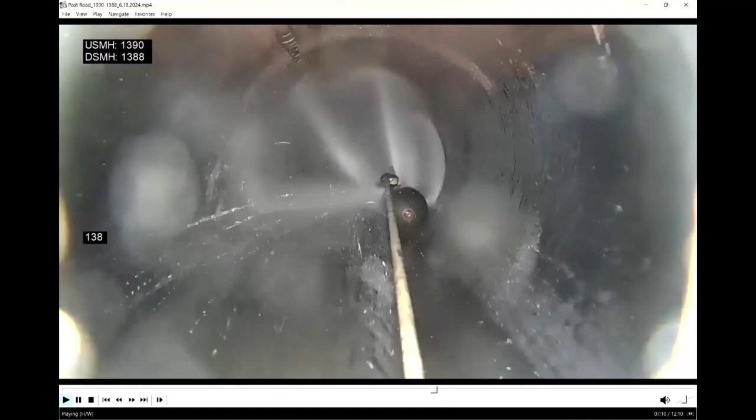You're gonna need a computer, right? Are you gonna set your computer up to show them things? Is this done? I'm fine, I don't need to. Okay, then I'll stop. I only have pictures, I don't have a video of the other manhole. Oh, okay, then I'll hold it.

Okay, this is what's queued up on the screen, let's see, 7B. All right, go ahead, let's not jump to that. Oh, you can take it out of order. I was only gonna do that because I thought Lindsay needed the machine, but it sounds like she doesn't need to use her machine. Okay, so we don't know what the mystery element is yet.

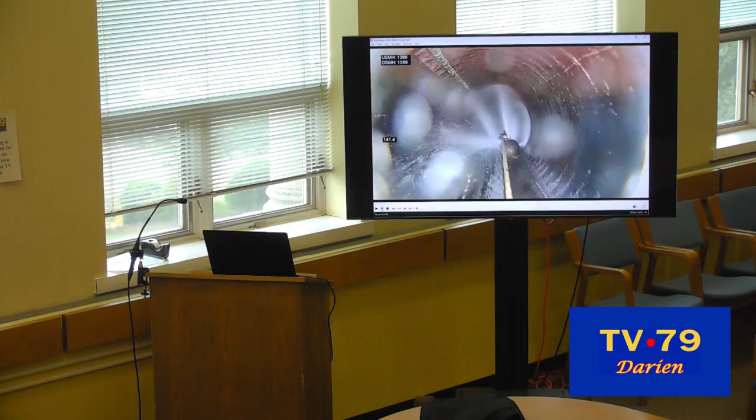This is suspense builds, waiting to see this. There's 5 people in town that have been waiting. Plus our home audience. Wait a minute, bated breath. He's gonna guess, what are you writing down, a guess or something? Voting on, what about Bob? Oh yeah, let's move on from that.

All right, so we have completed item 4, and those videos were constructive, thank you. So I do want to be conscious of the fact that it's 6:30. How is everybody feeling about time?

Item 5 is probably a longer discussion than a shorter one. Let's table that then.

Okay, so everybody got the 2-pager that I put together based on our conversation at the last hearing. I would love a copy of that. Here you go. Anyone else want a copy? I haven't had a chance to read it because I was very busily matching numbers. Understood.

Again, it was just an attempt to start getting our conversation down in writing about going after illicit discharges. And you heard what Tom had to say, he had some thoughts as well. Stonington has an ordinance, and Greenwich too, two good Greenwich ones that went after some illegal connections. I need to get a copy of that.

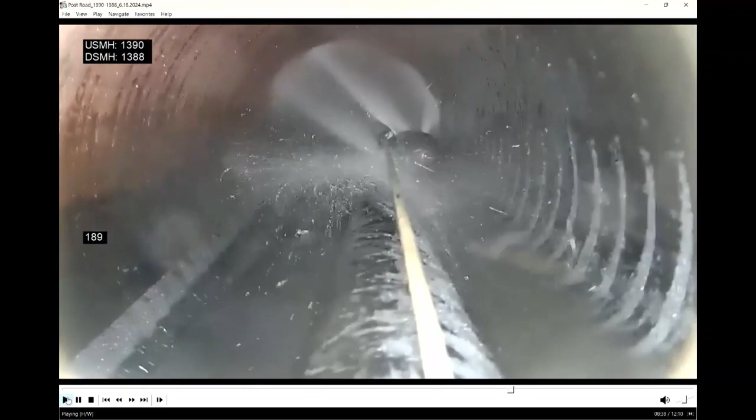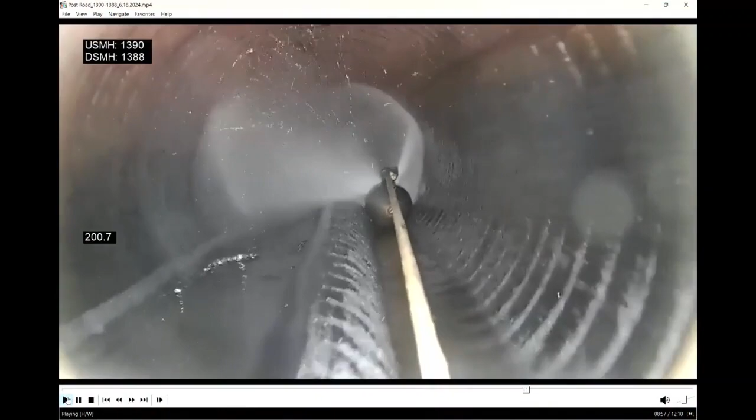Wait a minute, where are we? So what do we think? This is the post road, right? I'm saying if we're at that line most of the time, this sounds like a really bad spot. That ridge runs for quite a while. I'm talking about the overall size fill of the pipe. Yeah, we're running full- if you opened it right now, I'll bet you'd see it's up there. So this is a major area of concern for capacity.

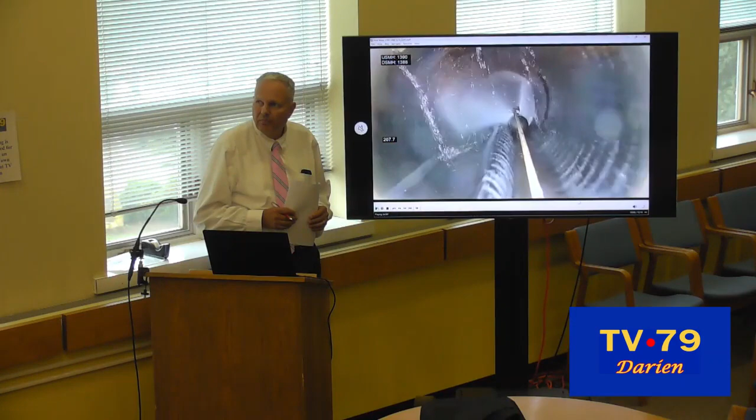There was an object in the pipe which is no longer there. Prior to us discovering this, they had identified that there was some mystery object lodged in the pipe, and they couldn't get it out.

Two or three contractors tried it. So as part of phase 2, we added a bid item for them to bypass the flow and televise it so we could get a good image of what was in the pipe. When they got to the actual location, the object was no longer there.

So at some point it became dislodged. It wasn't there when they were out there. They did not report anything coming out of the pipe when they cleaned it and dewatered it. So at some point it did dislodge, but we discovered this other thing.

Stop for one second. I'm also noticing that the flow line looks lower now, so there's a bit of a sag. That could have started higher. The mystery object was at 180 feet, and the flow line was at about 75% or more at that point. Past 180 feet it comes down.

We've got a half or so that was holding something back, flow-wise. It took up a good portion — it was probably almost 40% of the pipe.

Where did it go? When we looked at it in the pipe, we don't know when.

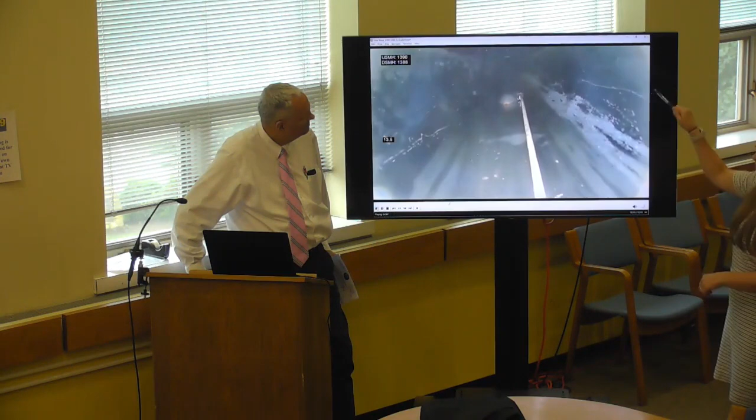Is that an area of concern? Was it over here on this side, the wrinkles? I think it was from when they cleaned it, using really high pressure jetters previously to try and get this out. So I think it was starting to kind of scour the pipe a little bit, working off anything that was built up there, but if you sit too long with that high pressure it can start polishing the inside of the pipe.

It looked very uniform, it spins around. I thought maybe it was rebar, but I think this is VC. No, this is the ribs of the pipe, the ribs of the pipe, not rebar from underneath. But it's a VCP pipe, it's not concrete, as far as I know.

Yeah, like when we did the post road, the hydrogen sulfide ate away the concrete and left the ribs. But look, there's no ribs on the top, you know.

I think there's only one connection coming in, because the Cinema and the movie theater would come in through there. Is there a bank connection too? Oh, no, the bank's out. So I think the Cinema connects at the actual sidewalk, and there's a manhole there - the sidewalk line goes into a connection that comes in right at this upstream manhole. So the only thing coming in must be the bank, or maybe this is where the Cinema sags - yeah, there's definitely a bit of a sag, and you can see the grease at the top.

There's a chunk. So if the laterals were coming in, what height would they be coming in on the pipe itself - mid pipe? Depends on the elevation, I mean, sometimes service connections could come in at the top. Obviously you don't want to go too far down trying to figure it out, but most likely it was around the top, kind of like 2 o'clock or so.

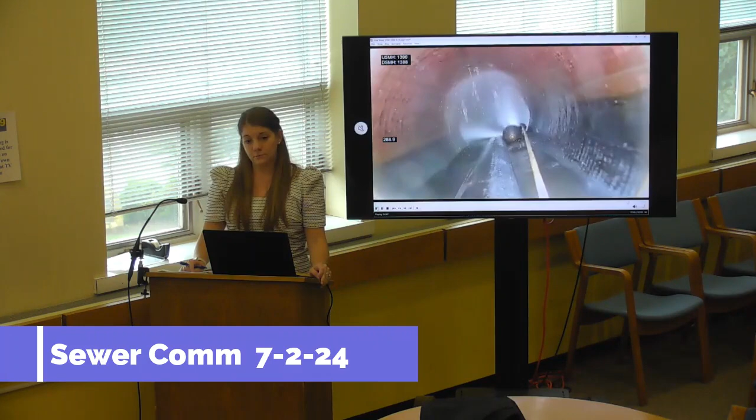Right, but if you repeated it after you've done all the good work of lining and sealing the manholes, and you were still at 75%, then we would know that's sump pumps. Yeah, that's why I'm looking forward to being done with phase 3 and then getting another baseline of how successful we were, and where we go from here.

And the fact that we're cameraing 8 miles a year. Have we done 24 miles? Not yet. We've done 16 miles so far. We think we have it narrowed down now to the 2 sewer sheds that we're going to hit next. So we've done 16 miles, and this will be our next 8 miles.

Well, technically the SSES—the year we did it, 2021, was the first year. So we've done 24 miles, and we're going to do another 8 before the end of the year. And it's all been within the Stony Brook study area. We also tend to find stuff during the CCTV that wasn't necessarily obvious during the inflow testing. Yes, but then sometimes it disappears and reappears, which is why you can put the camera back in.

Based on some of the data presented earlier, and having the flow meters north and south of the whole sub-sewer shed, and having those pipes lined in phase 2, quite a few were lined. Could we extrapolate an I&I figure not related to maintenance issues we've done on that sub-sewer shed with that data point? The sub-sewer shed meaning the sewer shed they're going to be connecting to? Yeah, because it seemed like we had it all the way to the pump station, and right above the highway you have 151 houses, or whatever number, that were on Fitch and Hecker, and a lot of those got lined.